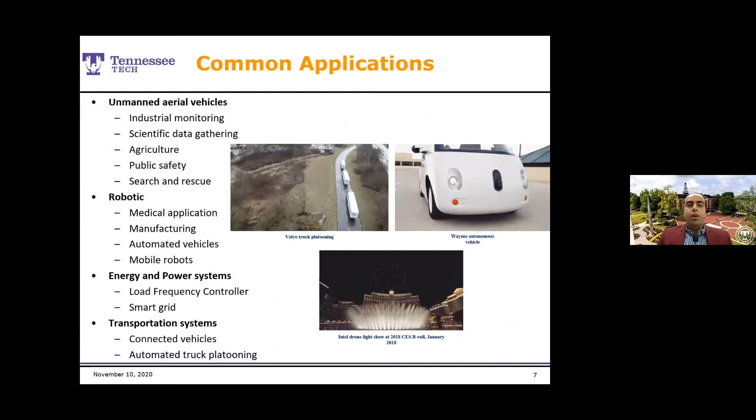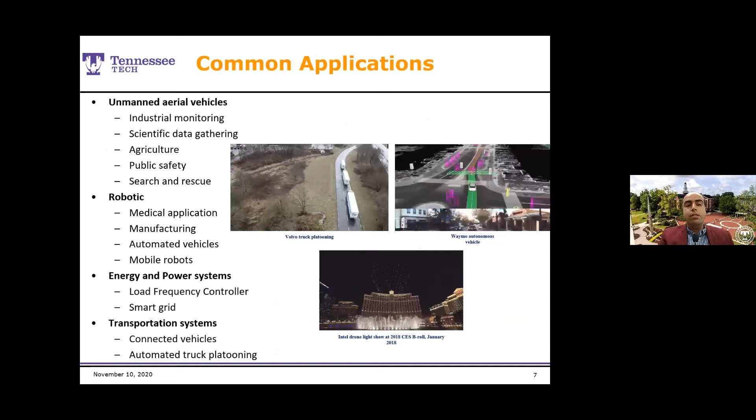We also see a lot of applications for network control systems in energy and power systems, such as smart grid systems. Finally, and one of the most important, we see many applications for network control systems in transportation systems, such as connected and automated vehicles.

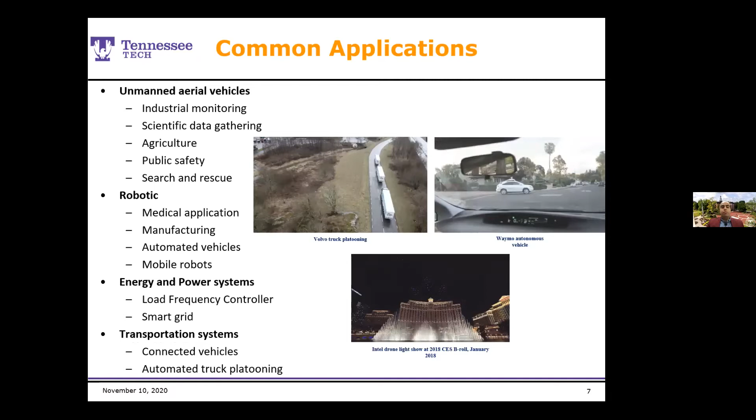Let me ask a question here: what is the difference between security 20 years ago and now? Obviously, if we think about it, we only had data security issues in the past. Now security involves cyber-physical systems, and it can cost a life.

Let's think about a scenario where I'm driving at 70 miles per hour. If a hacker hacked my system, my car, or my vehicle in this case, while I'm turning in a curve, and my vehicle doesn't turn or doesn't go through the curve, what is going to happen?

So the difference between security 20 or 30 years ago and now is the fact that we are dealing with cyber-physical systems and critical infrastructures. That is my research—I'm looking at security of network control systems which have applications in critical infrastructures.

To give you another example, a major cyber attack on the US electrical grid can cause an economic loss of more than $1 trillion.

That's a huge number. If we want to think about a cyber attack—although the 2003 Northeast blackout wasn't caused by a cyber attack—let's imagine for a second that it was. That specific incident affected 50 million people.

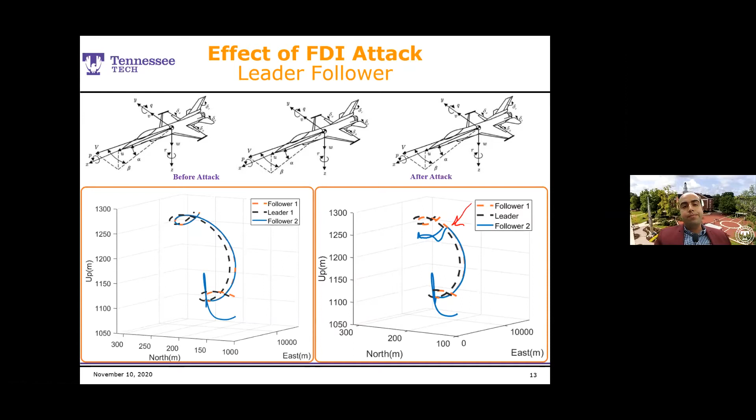So now, what are the solutions? In order to talk about solutions, I came up with one simple example, which is a linear control system. Let's consider a network control system with a simple LTI system, and an optimal control case just for simplicity. So the system is going to be under attack with a probability of P.

So we have a couple of solutions to solve or overcome this issue. The first solution is to correct the received signal using estimation of attacks. The second type of solution is to use the estimated signal for control purposes. The third solution, we can simply say, let's drop this received signal and do nothing.

But if we drop the signal, there are some other solutions I'm going to talk about. If we drop the signal, we also have several other techniques to overcome the issue. We can reduce the probability of attack by redundancy in communication channels or improving the encryption algorithm.

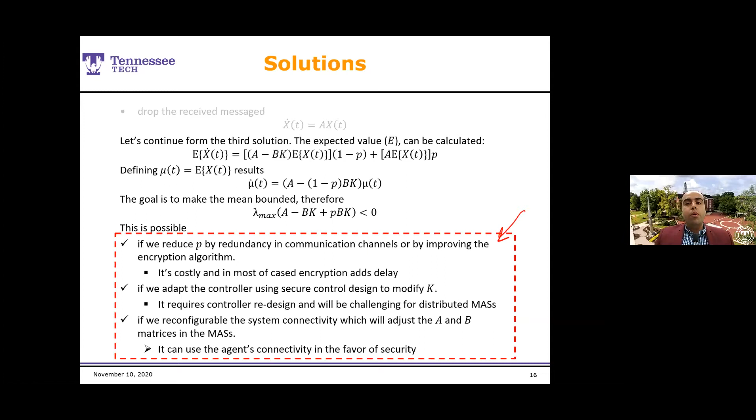Some people might say this is costly, so there are other types of solutions. We can adapt the controller using secure control design techniques, or reconfigure the connectivity between agents or other parts of the system. So here I discuss one method to detect and mitigate FDI attacks in real time.

Since FDI attack can make network control systems unstable or inefficient in some cases, it's necessary to detect FDI attacks in real time. I observed that most attention has been invested in detection of FDI attacks, while less attention was given to real-time mitigation and compensation.

Usually researchers, based on the literature, use model-based learning algorithms to mitigate FDI attacks, but they require an accurate model of network control systems. Some researchers use learning-based techniques despite the fact that they require extensive computational efforts.

So here we developed a secure control strategy to detect and mitigate FDI attacks using a combination of model-based algorithm and learning-based algorithm in this specific research project.

So we consider a network control system under unknown inputs, measurements, and process noises, and also FDI attacks. We consider some reasonable assumptions, such as Gaussian noises for measurement noise, and also bounded FDI attacks and bounded unknown inputs.

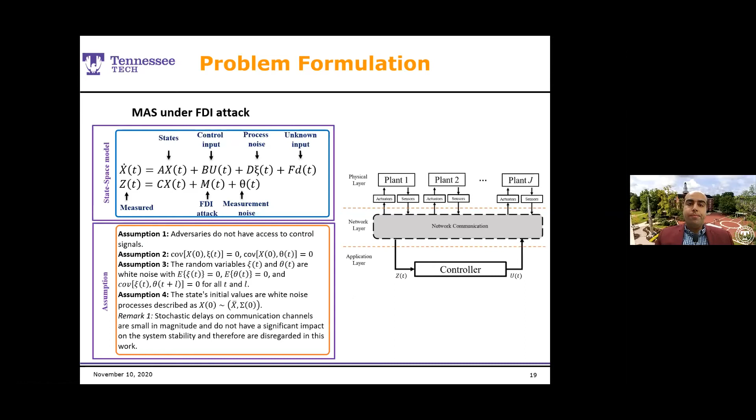First, we designed a state estimator based on our Lyapunov stability analysis, which uses a neural network to estimate the FDI attacks in real time. The next thing we needed to do...

Since measurements are noisy, we use extended Kalman filter to update neural network weights. Actually, this was really beneficial in our experimental analysis because we have measurement noises, and using this extended Kalman filter for updating neural network weights was really helpful and gave us more accurate results.

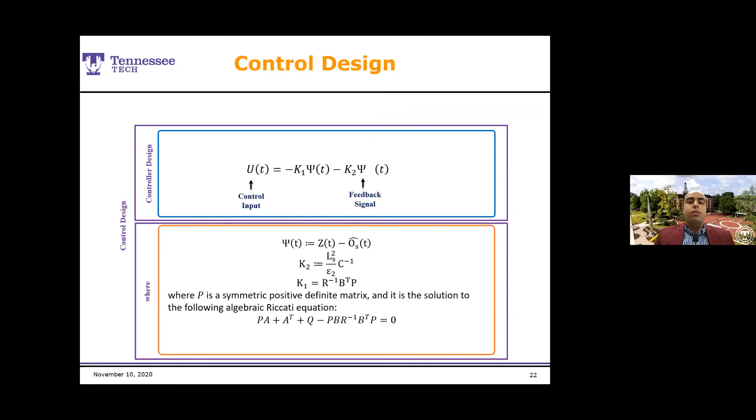And then finally, the controller is designed to be robust to unknown inputs. We define the feedback signal based on our stability analysis, which uses the estimated FDI attack and output signals.

We proved the stability of the system under FDI attack using this theorem, Theorem 1. I'm not going through the proof of this theorem, but I just want to talk about it briefly.

We can show, using this theorem, that the state trajectories of the system, under the given assumptions with the state observer defined earlier and also the designed controller, are globally, uniformly, ultimately bounded, or GUUB. You can find the proof and more information about it in one of our submitted IEEE Transactions papers.

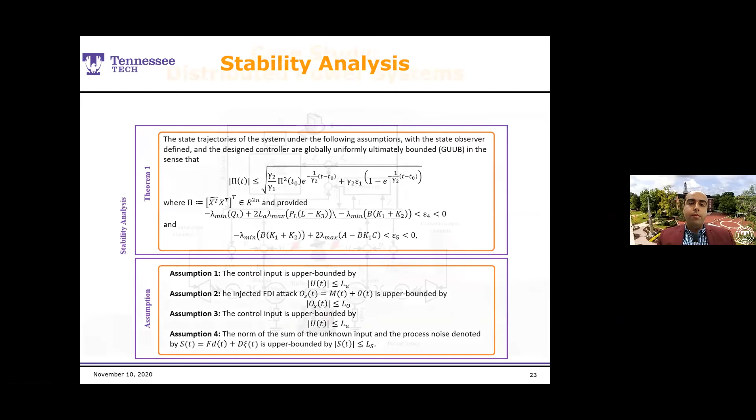For the case study, we focused on centralized network control systems, and also we assumed two power systems that are sending information to these centralized control systems.

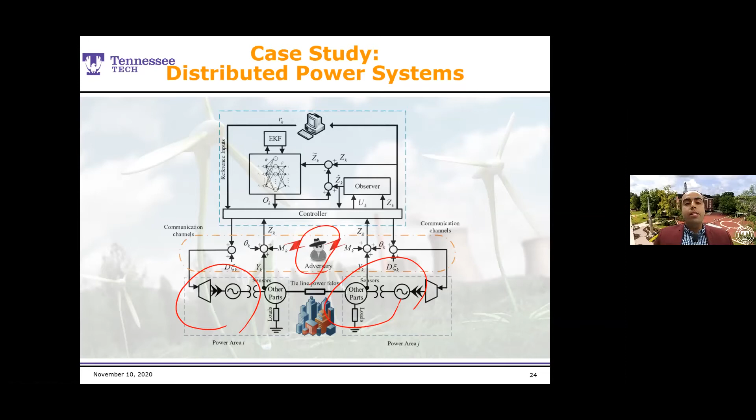These control systems are under FDI attack, where the FDI attacker can inject false data into these communication channels. We investigated the accuracy of the detection algorithm and performance of the secure controller under four scenarios.

The first scenario is a single non-periodic FDI attack, as you can see in the figures. The second scenario is a single periodic FDI attack injected to one of the agents.

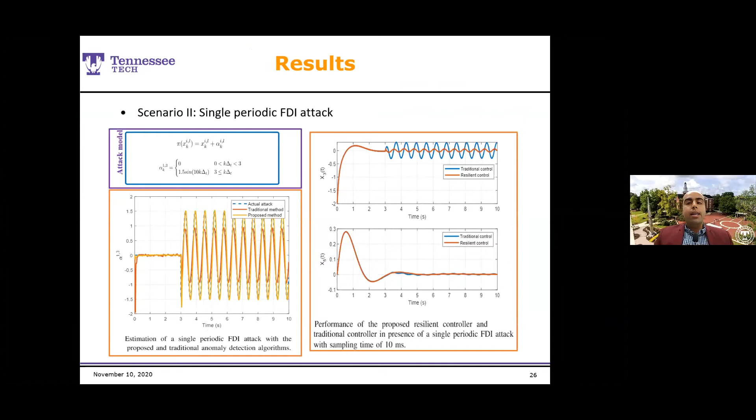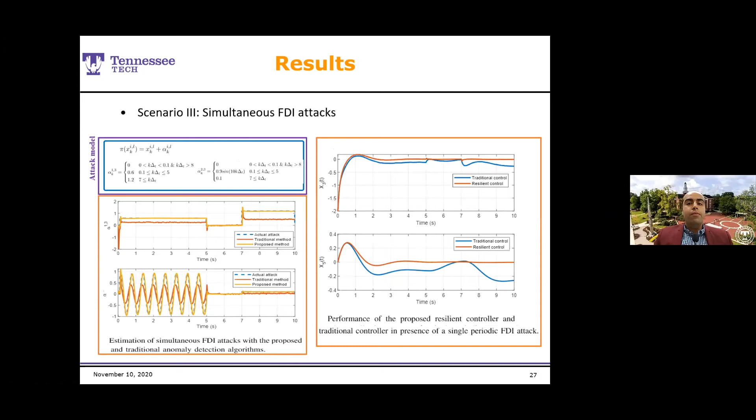In the next scenario, we check the performance of the developed controller for the system under multiple FDI attacks injected into both agents. Finally, we showed its accuracy under pulse train FDI attacks.

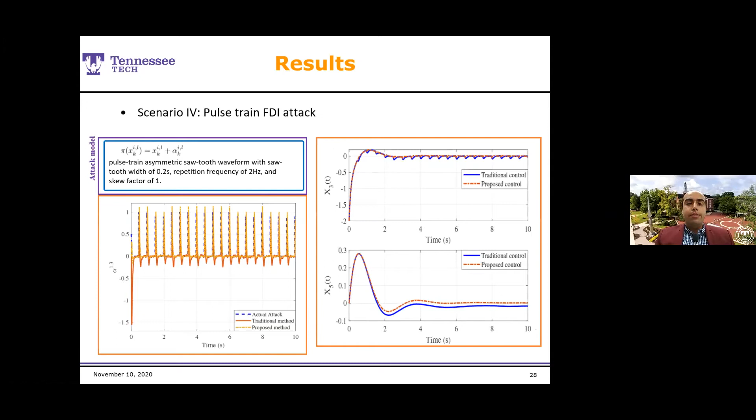It's clear through our numerical analysis that the performance of the detection and control algorithm are more accurate than the most recent methods in the literature.

So now let me talk about another research topic that I'm focusing on. Here I will focus on time delay attacks injected to network control systems with nonlinear dynamics. We developed a continuous controller for a network control system composed of agents with nonlinear dynamics.

Those agents are subjected to time delay attacks and additive disturbances. The unique challenge here was the fact that the state tracking error is unmeasurable because it's under attack. Therefore, controllers cannot use the state tracking error to coordinate the network control system formation.

To address this issue, we came up with two novel error signals, which I'm going to talk about in the next slide.

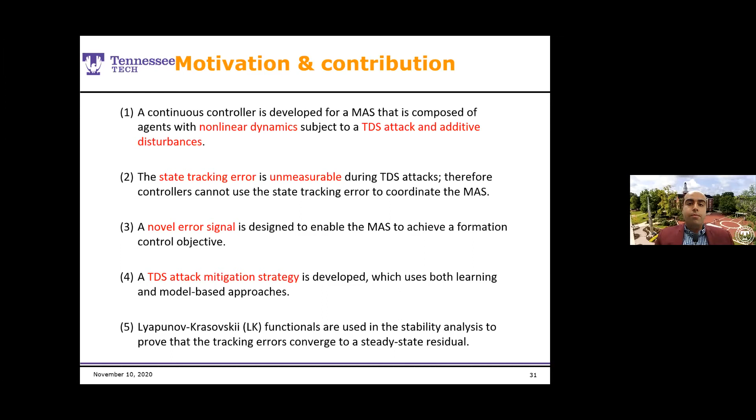So here is the leader-follower network control system under time delay attack and disturbance. We consider that an attacker Pi is injecting time delay to signals transmitted from agents to leaders.

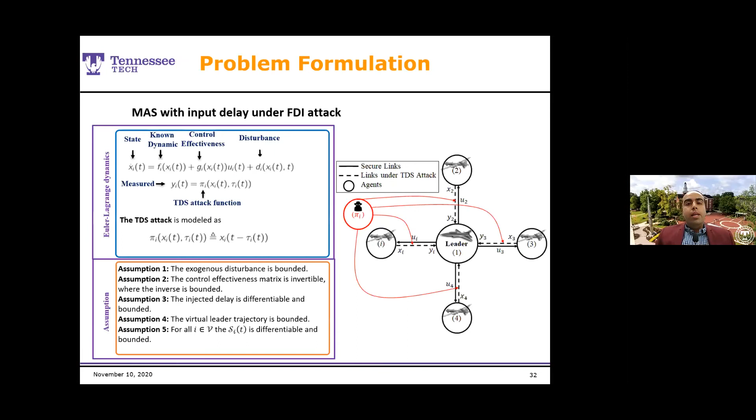We assume that disturbances are bounded, and also the time delay attack is bounded. So the main objective of this research is to design a centralized controller such that the state tracks a virtual leader trajectory despite the injection of time delay attacks.

The second objective for us is to design an observer to estimate the states of the network control system in real time. So here you can see all of our error signals, and these two are novel error signals.

Which we propose in order to overcome the issues with time delay attack.

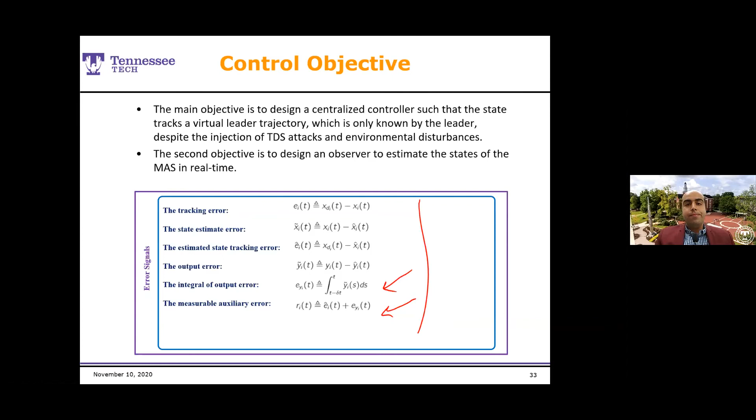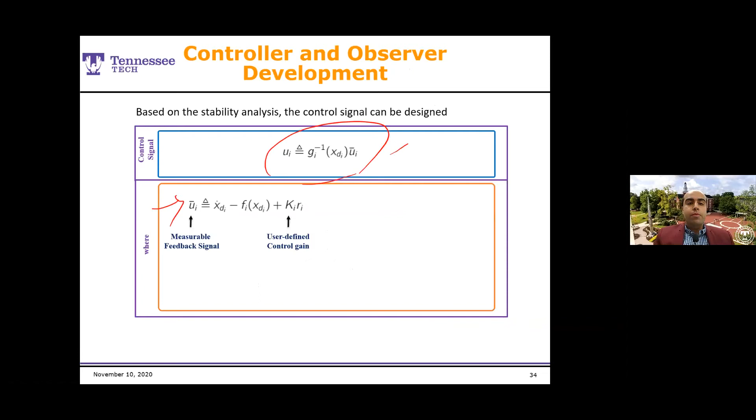Here is our observer design, which is used to calculate the auxiliary error signal. The observer uses a neural network to estimate the amount of delay injected to measurement signals.

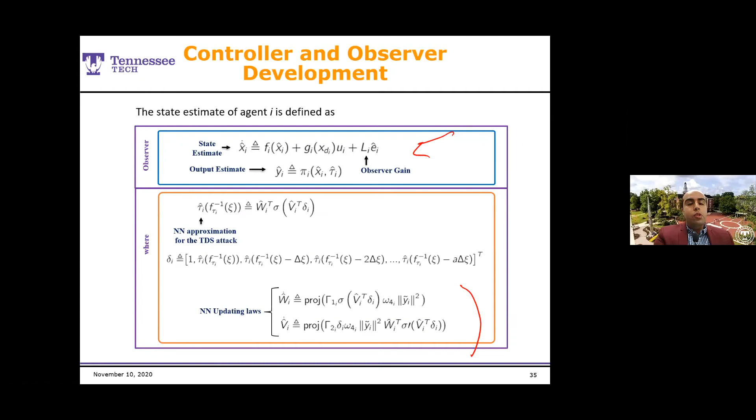And the weights of the neural network are updated based on these two equations, which are obtained through our stability analysis.

We proved that the designed controller, state estimator, and FDI attack compensator ensure a semi-globally, uniformly, ultimately bounded tracking, provided the following sufficient conditions.

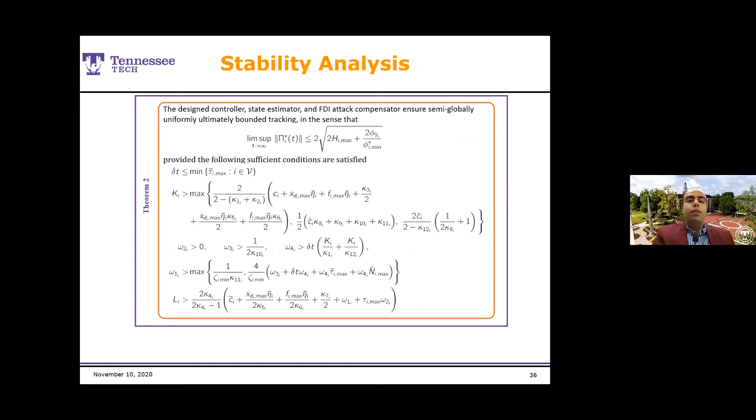To show the proof, we defined a Lyapunov candidate function which includes error signals and also neural network estimation error. We also defined PLK, QLK, RLK, SLK, which are our LK functionals, necessary when dealing with stability analysis of systems with time delay.

These functionals are necessary when we deal with a stability analysis of systems with time delay.

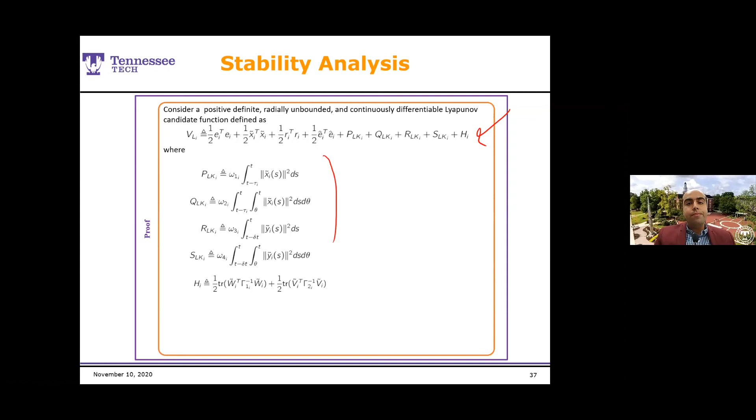Taking the derivative of the Lyapunov function with respect to time and using the Cauchy-Schwarz inequality, we can obtain the following inequality. Using the mean value theorem, and since time delay attacks are bounded, we can find this inequality, and then by rearranging, we can find V dot as follows.

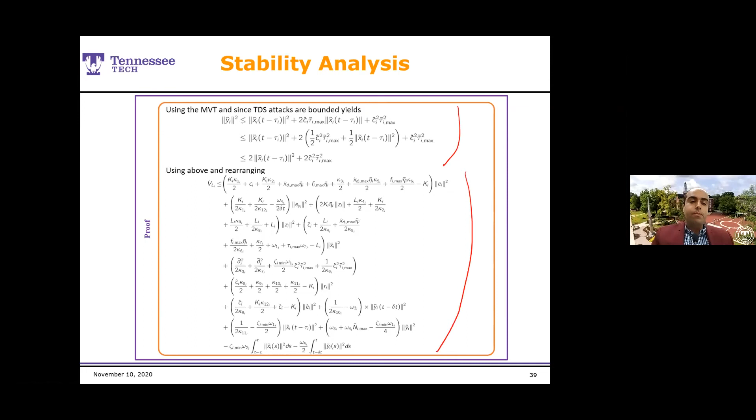We can further upper bound the previous inequality as shown here, and all these free parameters are positive values by satisfying those earlier sufficient conditions which I shared in the theorem.

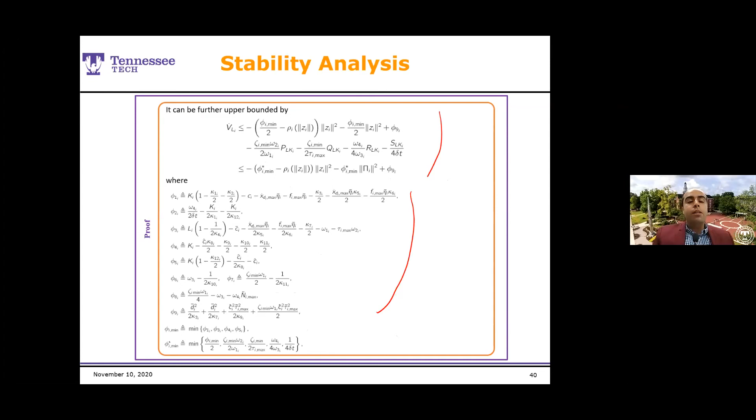With further simplification, we get this inequality, and using theorem 4.18 of Khalil's book, we can conclude semi-globally, uniformly, ultimately bounded tracking, which we were looking for throughout this proof.

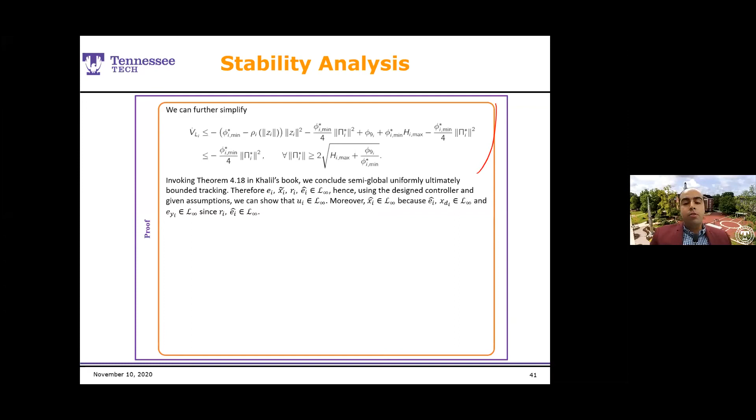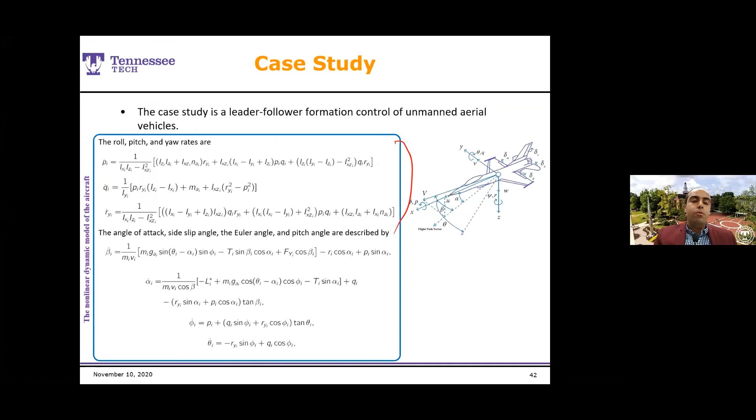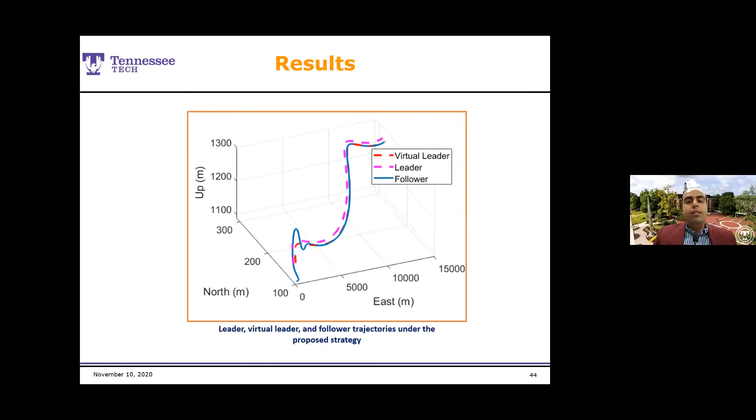Another application of network control systems is connected and autonomous vehicles. Let's discuss them briefly to find out why security of those systems is important and how we should deal with that.

Most current road accidents, almost 94% of them, are results of human errors. We heard that autonomous vehicles were going to come by 2020, 2025, and still we don't have them. We don't have a complete solution because we have a lot of issues in this domain. One of the main issues is trust in autonomous vehicles, safety and security of autonomous vehicles.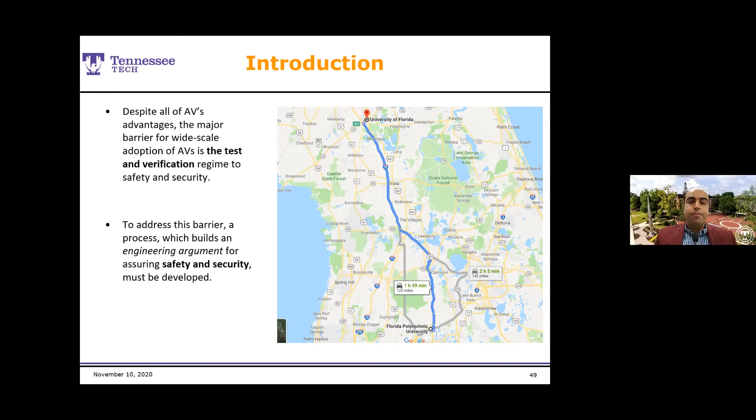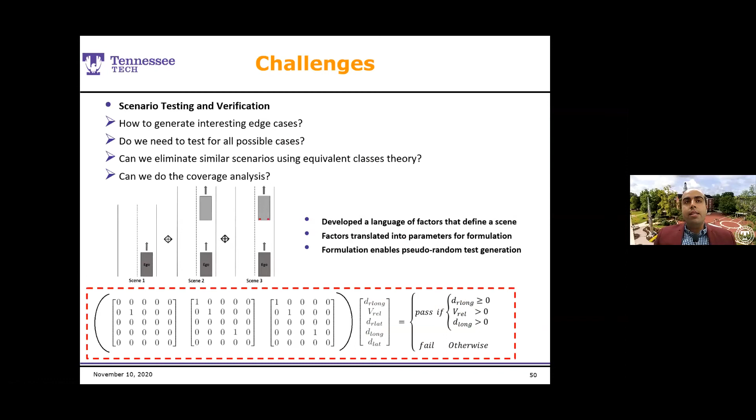There are several different challenges with autonomous vehicles. The first challenge is how many scenarios we have to generate, and how we have to generate those scenarios in order to test and verify those vehicles. How do we generate interesting edge cases? This is a really interesting and huge question. Do we need to test for all possible edge cases or scenarios? Can we eliminate similar scenarios using equivalent classes, and many other questions?

Another main challenge we have with autonomous vehicles is weather conditions. How does the perception of AV perform under electromagnetic interference, and how do we test AVs and their perception under different weather conditions? These are all different weather concerns which we have.

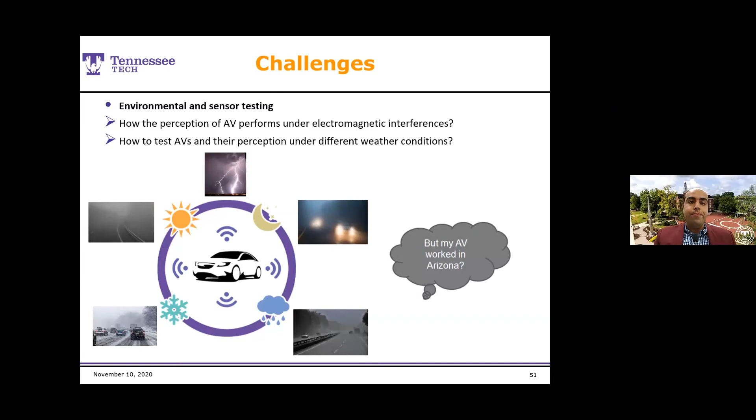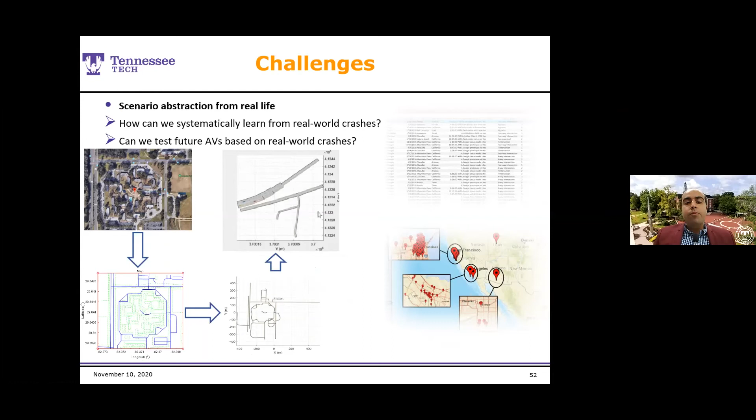Even though we are seeing autonomous vehicles on roads these days, we also see they have some crashes and accidents. But there is no systematic way to learn from those real-world crashes and test vehicles under those already-happened crashes. So that's another area of research we are focusing on.

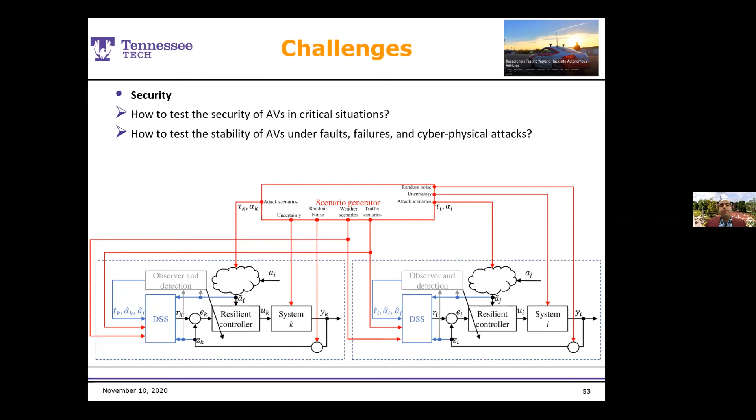Finally, one of the challenges I'm interested in working on is the security of control of those autonomous and connected vehicles. How do we test the stability of an autonomous vehicle in critical situations, and under faults, failures, and cyber physical attacks?

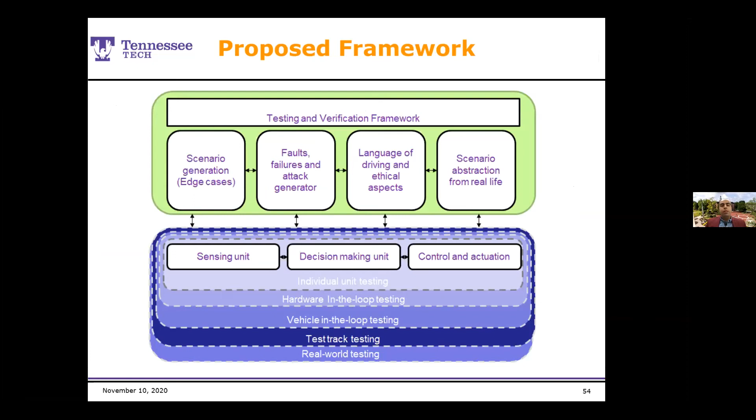In order to answer those questions, we started to come up with a framework which considers these challenges and generates scenarios in a modular way to test and verify connected and autonomous vehicles in hardware-in-the-loop, vehicle-in-the-loop, and real-world environments. As a case study, I would like to briefly explain one of our research projects, related to the security of cooperative adaptive cruise control.

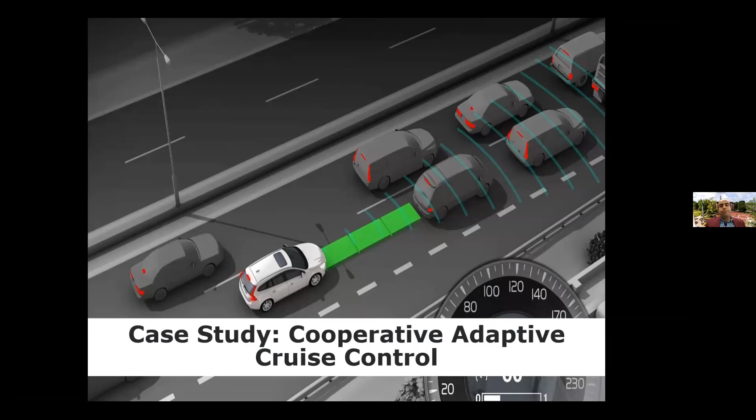I'm sure all of you are familiar with cruise control, we use it a lot, especially on highways. I used to use it every day going back and forth to university and home. So cruise control is well known, but what is adaptive cruise control? It uses onboard sensors to adapt its desired speed based on the lead vehicle, using radar, LiDAR, or other sensors. Cooperative adaptive cruise control uses the communication channel on top of onboard sensors to adapt its speed.

This is going to improve efficiency a lot if we use CACC, or Cooperative Adaptive Cruise Control. It can react faster to speed changes and follow the lead vehicle in a more efficient manner. But what if there is an attack, or an attacker attacks the communication channel between vehicles and follower?

So in this research, we designed a machine learning algorithm to detect false data injection attacks, which are injected into communication channels of the follower and leader. We also use a fuzzy-based control algorithm to adjust the speed and the distance between vehicles in case we have attacks in the system.

I don't want to go through the mathematics behind it, but I want to share the results. We tested the proposed strategy in simulation under a really hard scenario.

During the hard brake, we injected an FDI attack, or false data injection attack. As you can see in figure 6, the left figure, using the traditional method a crash could occur, but using the proposed strategy, the follower could follow the leader without any accident.

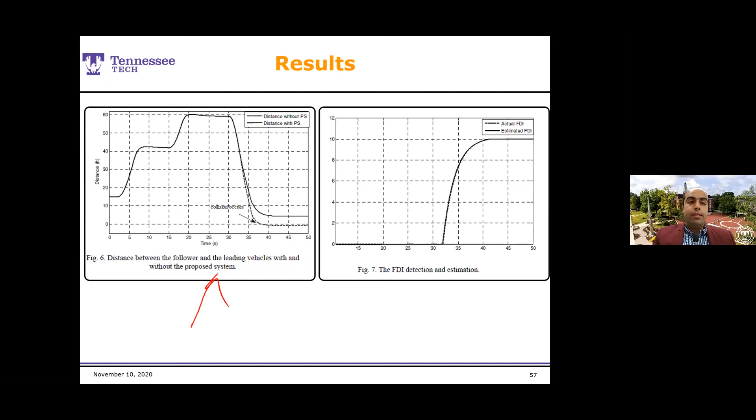To conclude, I would like to share two of our current projects, which we are doing at Tennessee Tech. I think they are interesting, and we just started working on them.

One of the projects is related to connected and autonomous vehicles. We are in the process of building an autonomous passenger vehicle. We plan to create a vehicle-in-the-loop environment to test vehicle autonomy using our simulation-based scenario generator, to test the system under critical scenarios, cyber attacks, and different weather conditions.

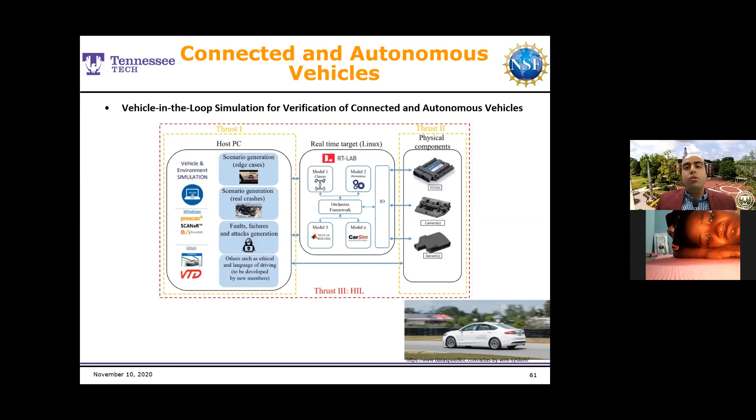The scenarios and environments are simulated, but the vehicle is an actual vehicle. That is going to make a perfect platform for us to test the vehicle under cyber attack situations. On top of the research, we are planning to use this platform for teaching courses, especially in our vehicle engineering and mechatronics concentrations.

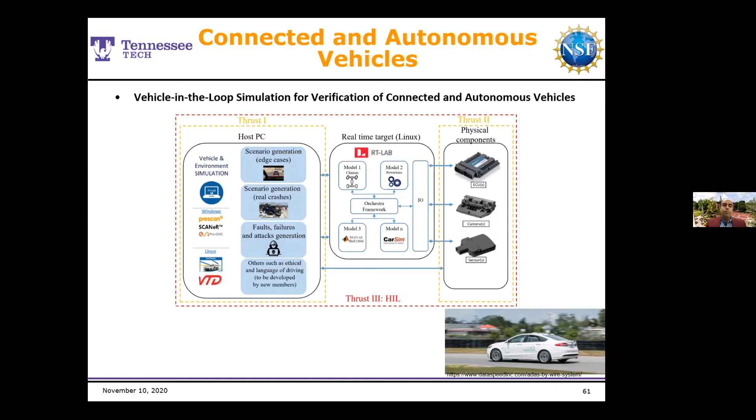The second project we are working on, which some of my students are currently working on, is modifying one of the already existing Formula SAE vehicles and making it autonomous.

This allows us to engage students from mechanical engineering, electrical engineering, computer science, and other disciplines in the field of autonomous and connected vehicles. Hopefully, if we learn and use our experience building this autonomous race vehicle, we can attend some autonomous racing competitions in the US and Europe in the future.

So if you have any questions, you can ask. Also, if you want, you can send me an email after this presentation. You can take a look at my website, ranks-lab.com, for more information about my research and our research directions. Thank you so much for your time, and I'm ready to answer any questions you may have.